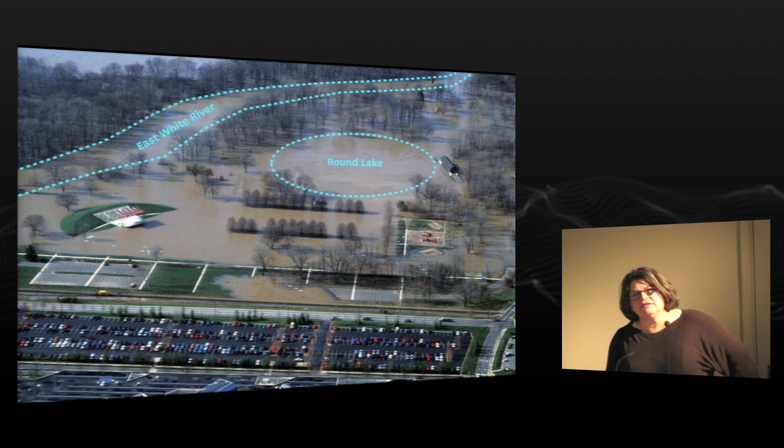This is Millrace Park, a fairly recent photograph of it. I bring it up because this was the first major project that the firm undertook, and the reason it was so challenging is that it floods. And I realized as I was preparing for this lecture that in those days, one really didn't think about water the way that we think about it now.

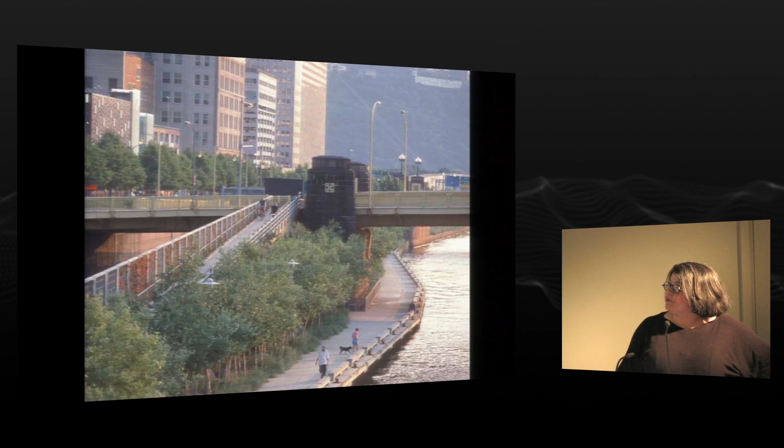Water was something that basically happened to your project, and you had to assume a position of defensiveness. In other words, you had to make sure that you could get all the silt off of the ground that was left. You had to make sure your light poles could withstand raging waters. And then the next large project we had was Allegheny Riverfront in Pittsburgh, and it too had this characteristic.

So we were starting to see a trend in our work, and really I have to say that it was with Allegheny that things kind of came alive for us in terms of how you work with a site in the condition that it's handed to you, and how you can start to use those aspects to not control the landscape, but manage it in a way that it can start to respond to the conditions that you're given.

So the first project is Alumnae Valley at Wellesley College, by now a mature landscape. I was there a couple of weeks ago, and it's really doing quite beautifully, thanks mainly to Wellesley's great perseverance in maintenance. But Wellesley is a really fascinating college in the sense that it was started in the late 1800s, and unlike many other colleges at that time, it really took the stance of looking at its geology and its physical history and plan the campus around that.

As opposed to someplace like the University of Virginia and many other campuses at the time that were still on the classical arrangement of an institution. And so for Wellesley, that was pretty advanced for the time. But the person that kind of directed them was Olmsted Jr., who did a master plan for them and identified that there were hills and valleys that they needed to respect.

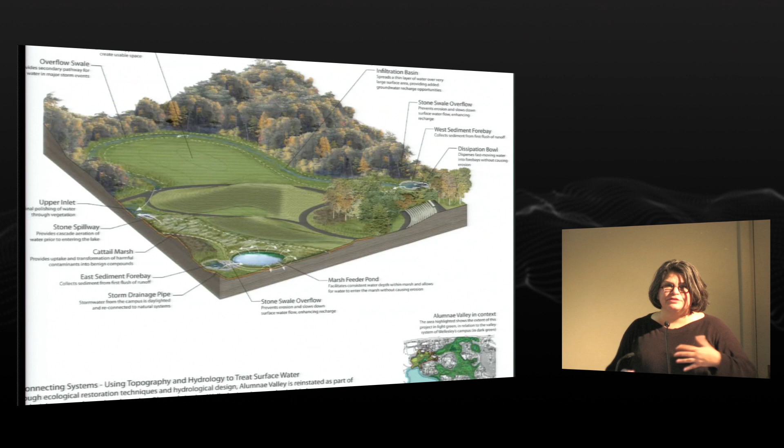out to Lake Waban. So the idea was to delay water and to allow it to be remediated by the plants, as well as just slow things down, because Lake Waban was being so taxed. And these are some of the devices that we used. This is the forebay that I spoke about. This is a sediment forebay, and all of this stone was unearthed as we were doing excavation on the site, so it was a great opportunity to reuse that material.

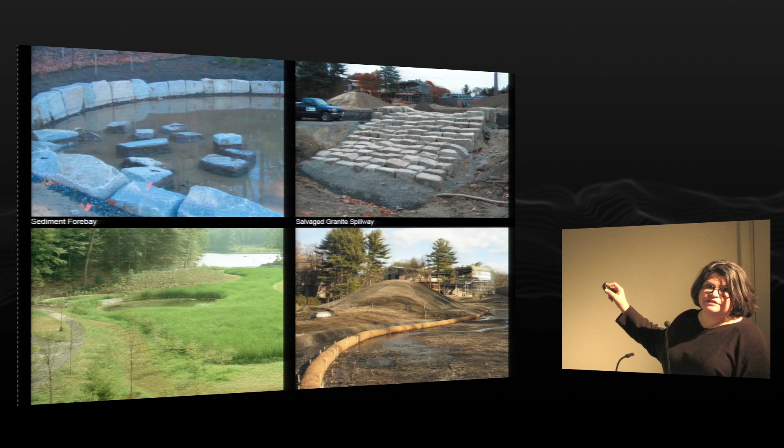So this is the spillway where both the marsh feeder pond and that long swale kind of meet. They go over these stones and get aerated. The water gets aerated before it goes back into the lake. So here is the cattail marsh and the feeder pond. So basically water is coming down through swales and also coming down to this area. It's settling here, solids are settled here, and then you have to clean that out every once in a while. But water is slowly released down here and then goes out to Lake Waban.

But of course it requires a lot of engineering to make all of this happen. But one of the things that these devices were used for was not just to do the hard work of cleansing the water, but also to add a level of intimacy and use, so that, for instance, this is at the base of the forebay. So there are rocks that are just kind of loosely tumbled there, and in dry times people can go and sit. You can also get to the water's edge and hear the bullfrogs, so kids tend to go there.

But the project really started as a complementary project to a campus center that was designed by Mack Scogin and Merrill Elam, fantastic architects. So this was a separate project. This was actually a site that we identified in the master plan as where the campus center should go, and it was right at the head of the valley that we were restoring.

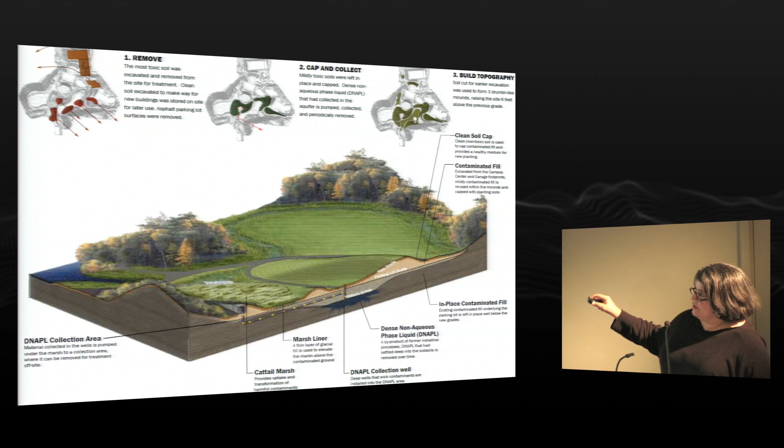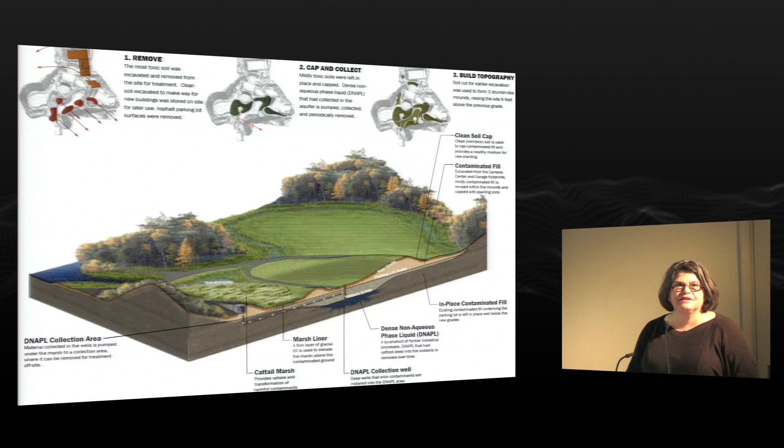So what we did is, this is the original grade. Because we had contaminated layers, we basically capped the site 3 feet and then put another 3 feet on top of that, simply to lose the amount of fill that had to stay on site. And then the mounds that resulted are really from using that additional fill.

So you can see that the mounds, which were a response to a problem with soils, actually contribute quite a bit to the experience of the project. So there are both flat areas like this for recreation, and then the mounds, which are covered in wildflower meadows and prairies.

I'm sure some of you are familiar with this. Back in 2007, the office took on looking at a master plan for the lower Don. Specifically, the project was to try to remediate the mouth of the Don, which over the years had really caused some pretty bad flooding problems.

And in fact, if you look at the area historically, this used to be a marsh. So here is the Don River coming down, and it was, of course, just as nature wants, going out and through the marsh, getting kind of cleansed, slowing down, and then being released into the harbor. But progress kind of changed that.

And interestingly, once the industrialization of that area started to occur, people were still, as we are today, interested in going to the water's edge. And in fact, they still wanted that experience. And so they would cross these incredible derelict lands in their Sunday best just to get down to the water.

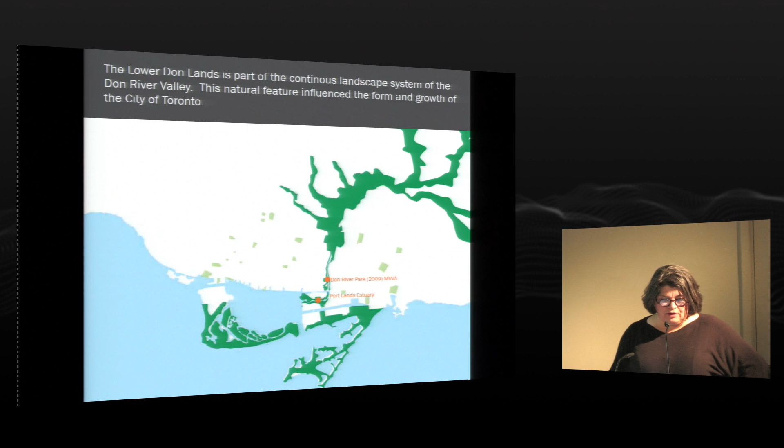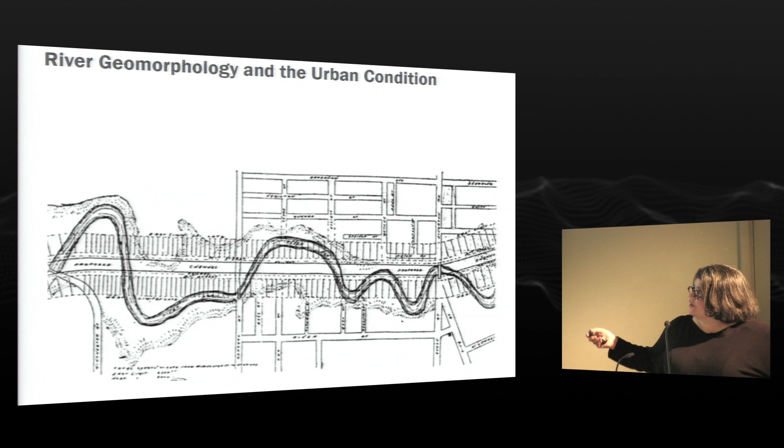This is one of the first things that we uncovered. It doesn't take a genius to see that when you channel a river that does this into this, you're probably going to have some problems along the way, because imagine stretching this out into one long string. It's probably 2 or 3 times the length that we're seeing in the channeled Don River.

And in addition to that stroke of genius to channel the Don River, the population in the area has just grown tremendously. So if you look at the impervious coverage just from 1990 to 15 years later, it's unbelievable. You guys are building like crazy.

So one of the first things we did was to work with our hydrologist. And by the way, I'm showing you these projects and taking full credit for them. But in fact, of course, every one of these has huge team members behind it. And so don't think that we're just so brilliant, we figured it all out ourselves. In fact, we rely a lot on sub-consultants to really help us figure these things out.

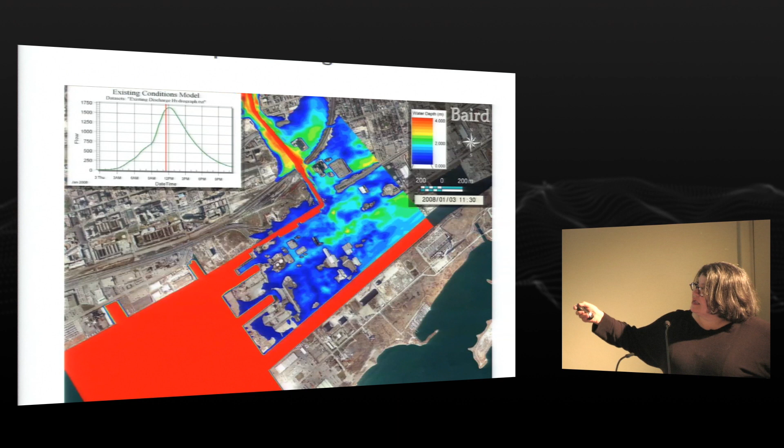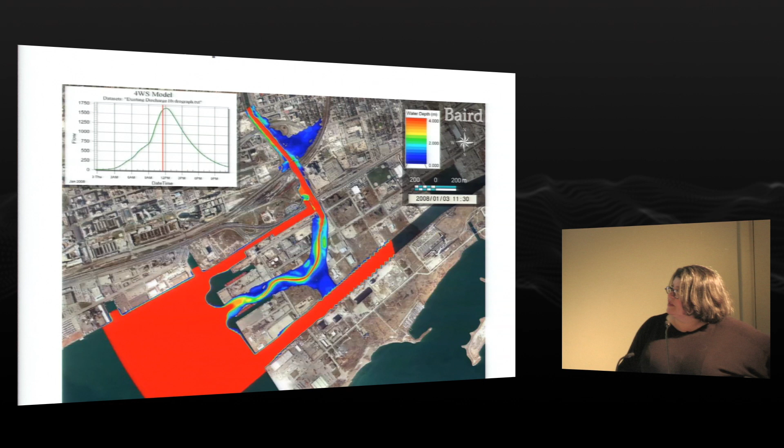This is the direction that we wanted to take it, where instead of having to take this sharp turn, which is not exactly how water wants to flow, instead we looked at a more naturalized mouth that would allow flow that would go in the direction that it would prefer to go, that it would go by itself if left unencumbered.

So this is the diagram that basically got us going on how we would handle this problem, which is the thought that if we're gonna let the Don River change its behavior at the mouth, then we have to allow it more than one way for it to get out, other than the narrow Keating channel.

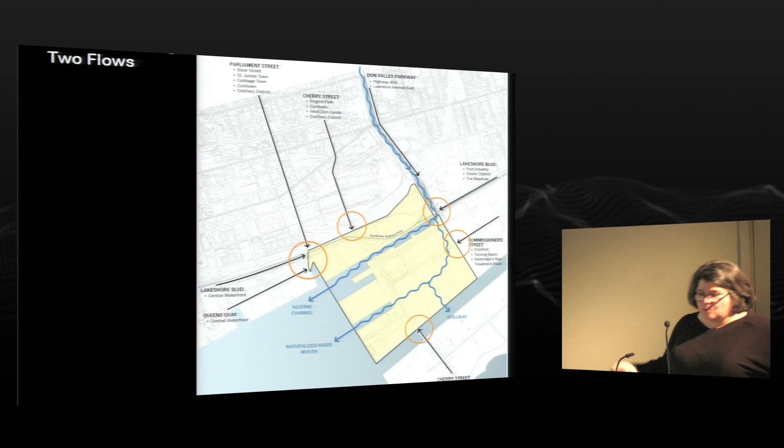So in fact, we started to look at those models that I showed you before and decided that we needed to have more than one way to get out. And not only that, but in the secondary route, there needed to be yet another spillway to help things along.

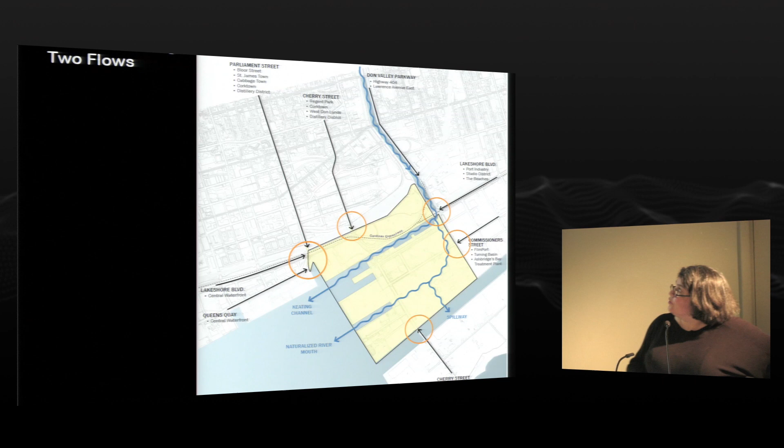But all of this comes with a lot of accessories, of course. So it's not just a matter of saying, okay, we're going to carve out the land and let the water go where it wants to go. It still is a pretty formidable force.

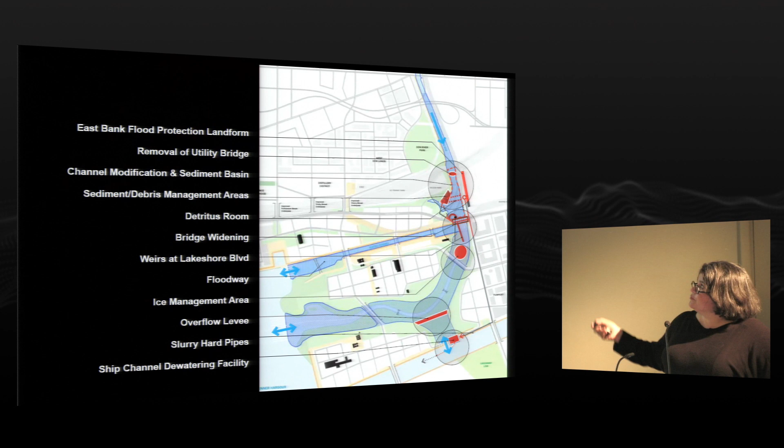And so a series of things like levees and thinking about where you put the ice when it comes down the Don, and what are the channeling, dewatering devices, where do you put the ships, where do you put the boats. And so all of this came into play, and as you can see, there's really quite a bit of infrastructure that has to be done in order for this to work. And the trick is, of course, how do you use that infrastructure to add to the project itself?

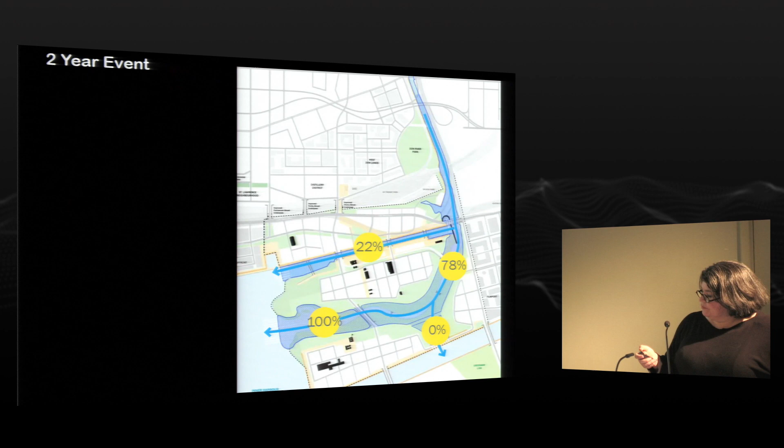These are some of the models that were done if we took the approach that we were talking about. So you keep the Keating open, and then you allow a spillway and you allow a diversion. So I'll flip through this and pay attention to the percentages. And what you're really looking at is this is 0% in a 2-year event. So 78% of the water goes there, and 100% goes out there, 22%. So you start to see how it changes.

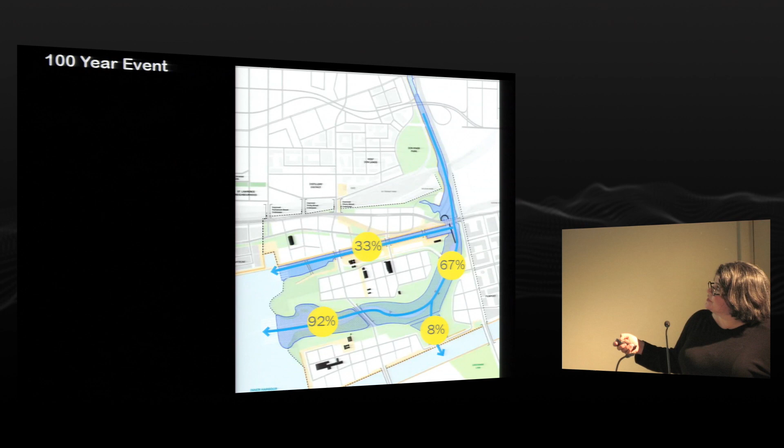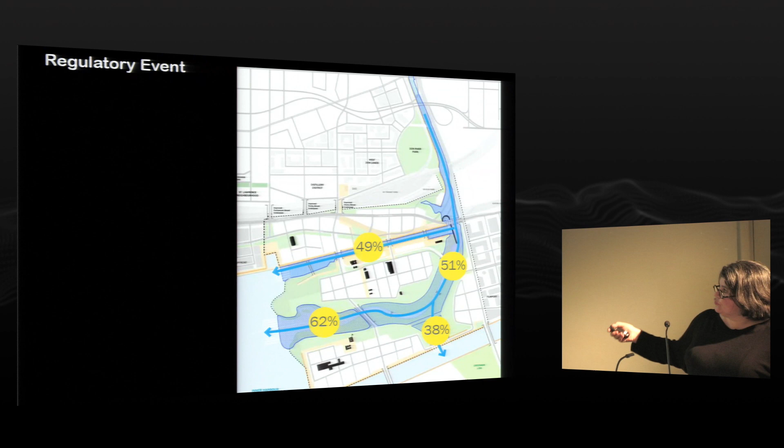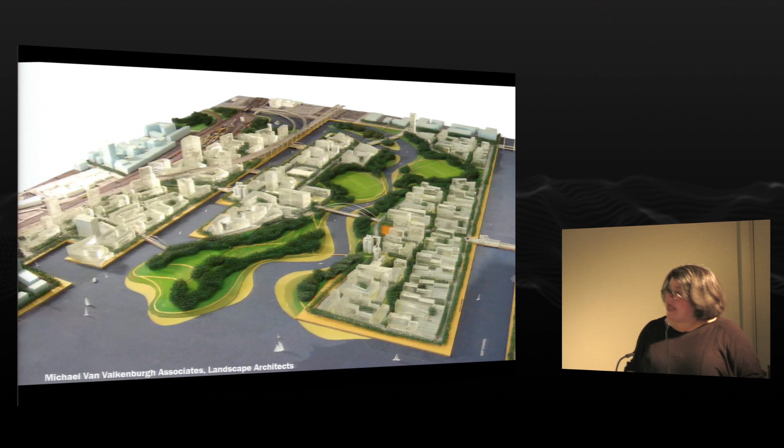So in coming up with this technological solution, looking at the hydrology of the site, it starts to help form how the site is going to be organized. And one of the benefits of splitting up the flow is that you create much more waterfront, right? So you have the Keating Channel left intact, but now you've got this flow, and so instead of one piece of land with water on the perimeter, now you have a lot more potential to have more people face the water and a chance for people to actually interact with that water.

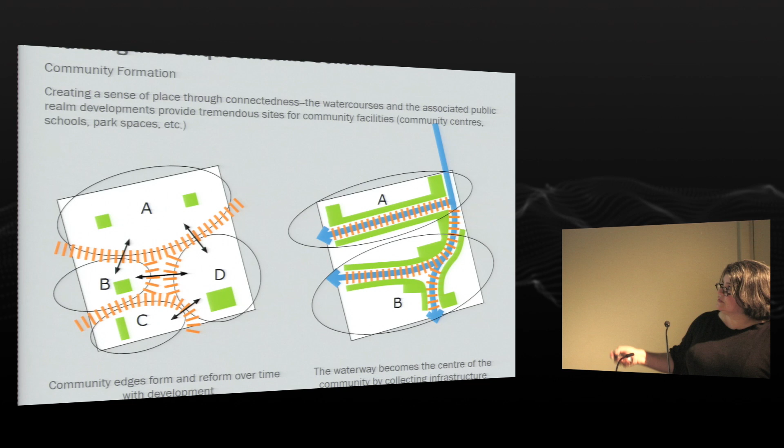And so you start to come up with different diagrams whereby the prime real estate isn't at the edge, it's actually in the center, just as much as it is at the edges. Don't squint too hard to read this, but basically we did comparisons of what the current Port Lands proposal was and what would happen to these various categories in the planned improvements and then the improvements that we were talking about. And so what you see is that in every case, you basically increase the amount of water area or the development fronting an open space. And so by making that split, you actually improve the quality of life for the residents in that area.

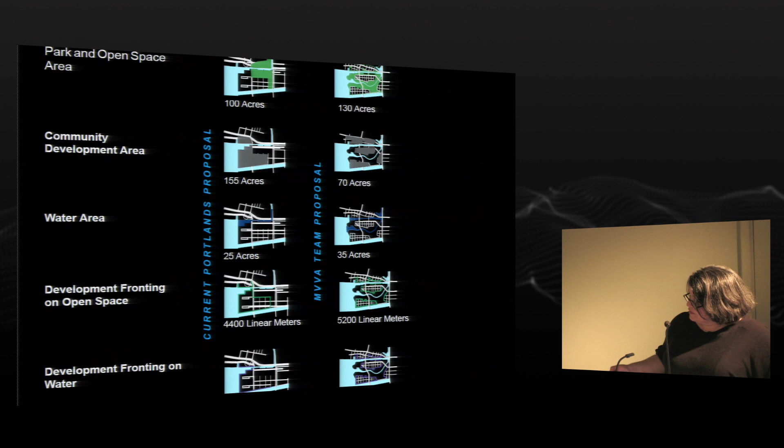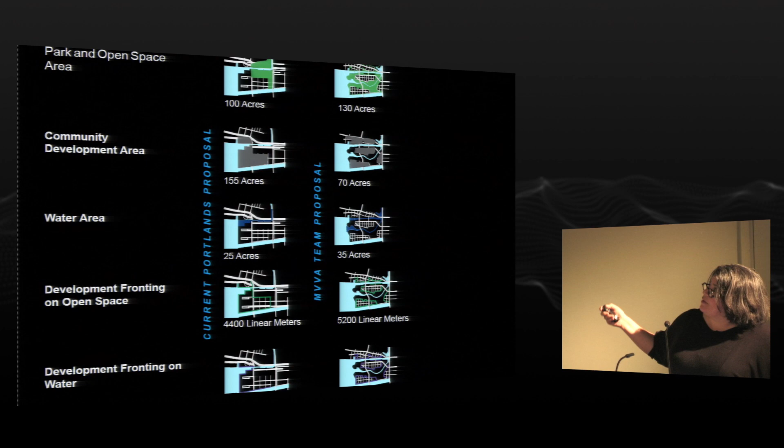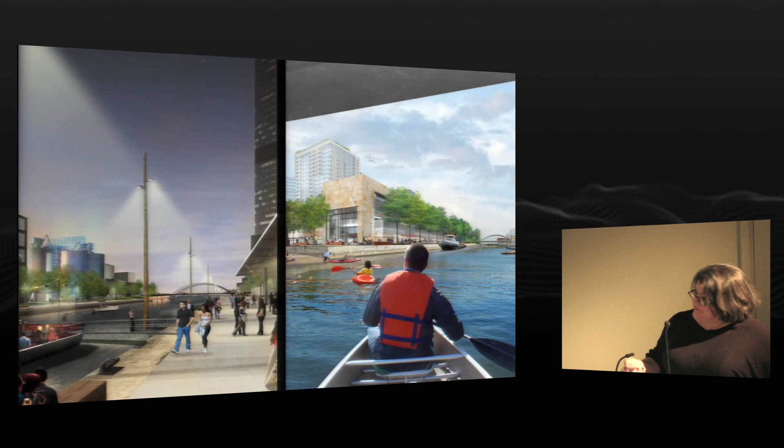The only thing that you actually decrease is, oh, wait a minute, may not be on here. Oh, community development area actually decreases, but the way that happens is the numbers are kept up by increasing the density. So you're trading buildings for landscape. What this does when you suddenly have twice as much waterfront is when you're looking at the design, suddenly there are many opportunities for different and varying landscape conditions. So you start to look at hard edges, soft edges, what happens at the Keating Channel if you're going to leave it basically as it is, what happens when you go underneath bridges. So you start to come up with a whole series of landscapes that were never possible before, and increase the versatility of the entire complex.

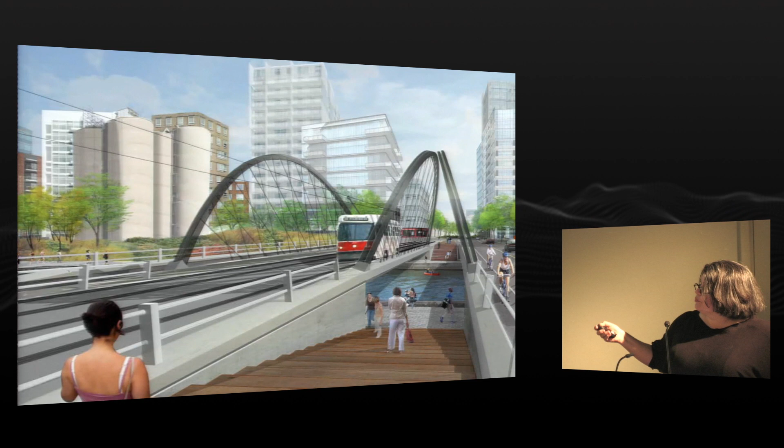And things like how does public transportation work? How do you approach the water from the Keating Channel? And then, of course, all of this green space that we've made has to be thought of in a very different way. It has to be compatible with the forces of the river.

We're just finishing up the Bush Library in Dallas, Texas. In fact, I was there yesterday. It was chilly. It's like what it is here.

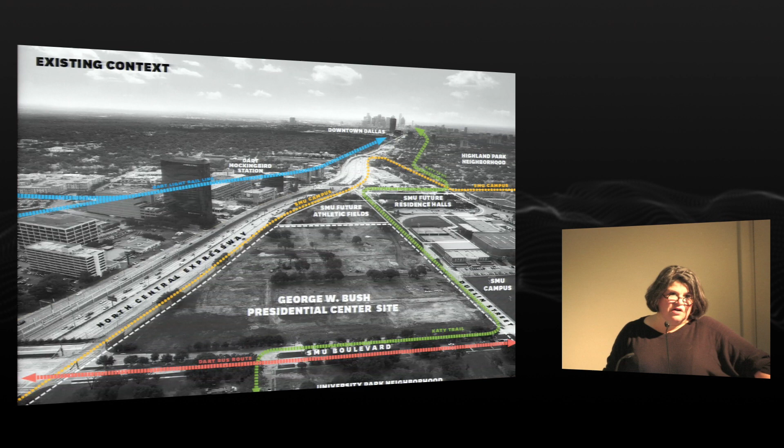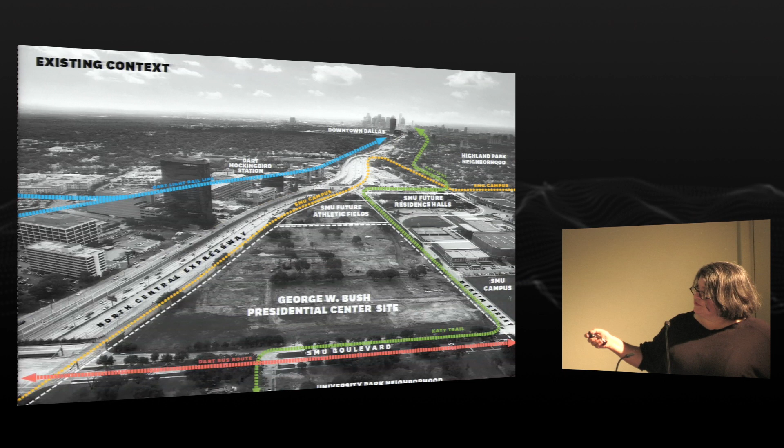And I should take a moment and say that Laura Bush was fantastic. At the Crawford Ranch, she has completely restored their prairie. She is no dummy about this stuff. You just don't get anything past her. But I can say that she was really the prime force in deciding that she wanted the full 25 acres. She negotiated hard with SMU to get the full site because originally they were offering them half of it. And she also decided that when they put in this landscape that it would be open to the public. And she really lobbied hard for all of that.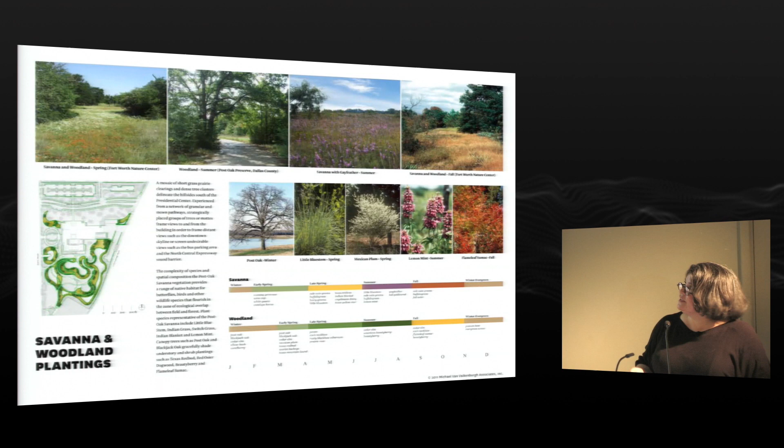So we would prepare these boards and go over things with her, and she'd say yes, no, maybe so. But the idea started very simply. The building is by Robert A.M. Stern.

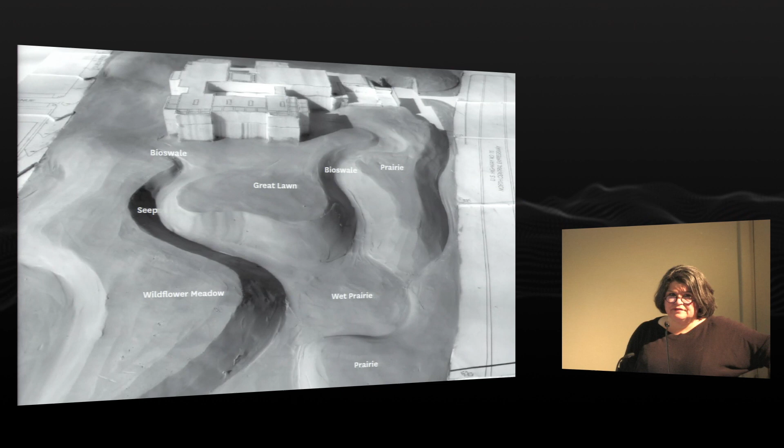And once again, an architect handing us a lot of fill, 70,000 cubic yards of excavation from this building that covers 4 acres in its footprint. It is huge. And so we had to, again, keep all of that material on site. It was too expensive to take off.

And so this is an early study model where we started to think about the building having a plinth or the Great Lawn, and then how we would have water move through the site. So these are bioswales, something called the seep, another bioswale, prairies covering all the hillsides, and then everything draining down to a wet prairie, and then a wildflower meadow on the highs as well.

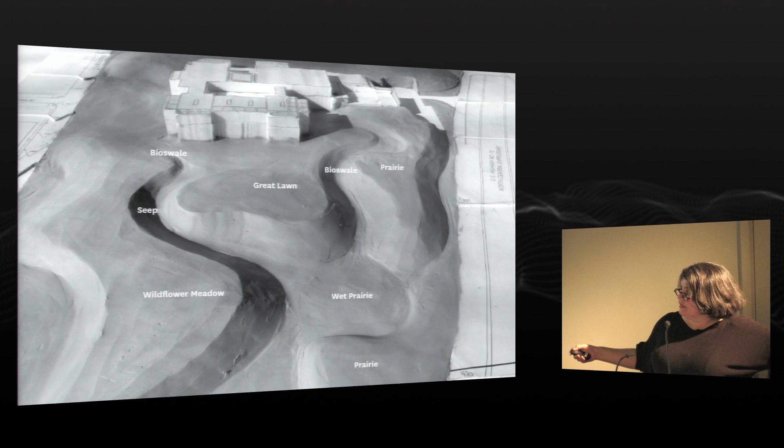So these are diagrams that we do early on to kind of study how things are going to work, as well as explain things to our client. I was talking with students earlier and saying, when you have really complex ideas, you need to try to make them as attractive and as clear to clients as you possibly can. And so you get into these quasi-technical and illustrative plans.

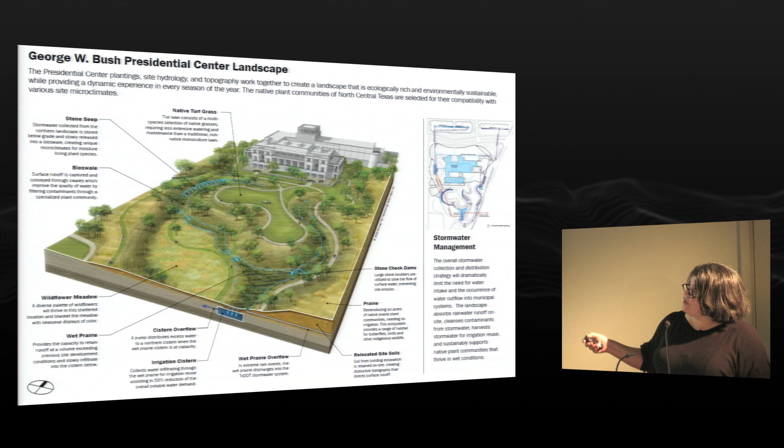So this is the advancement of the design. There's the great lawn that forms that plinth in front of the building. Here's the bioswales that go along. That's the seep. And then this is the wet prairie. And so if you look at how the water is channeled, because there are droughts in Texas all the time, one of the things we wanted to do was to make sure that we could capture as much water as possible to irrigate the landscape.

So basically the way that it works is here's the building. There are parking areas up top. The parking areas are divided, so this parking area actually goes into bioswales, is piped underground, goes into an irrigation tank here. That overflow is then directed to another irrigation tank under the wet prairie. Likewise, with all of the topography, water is coming off, going into those seeps and swales, and ending up in the wet prairie. So this is the low point on the entire site.

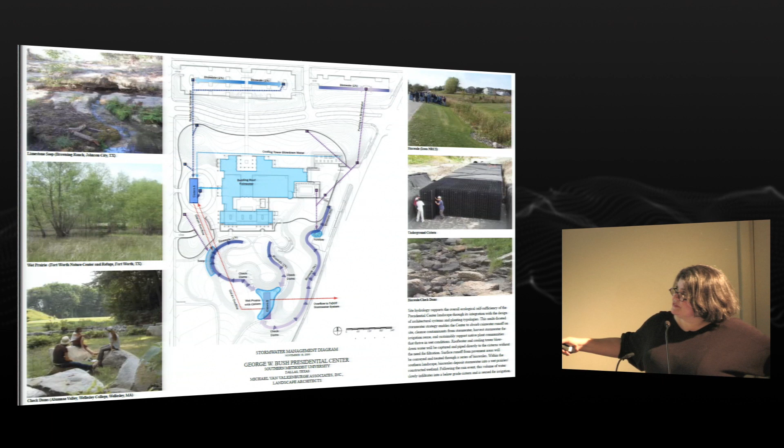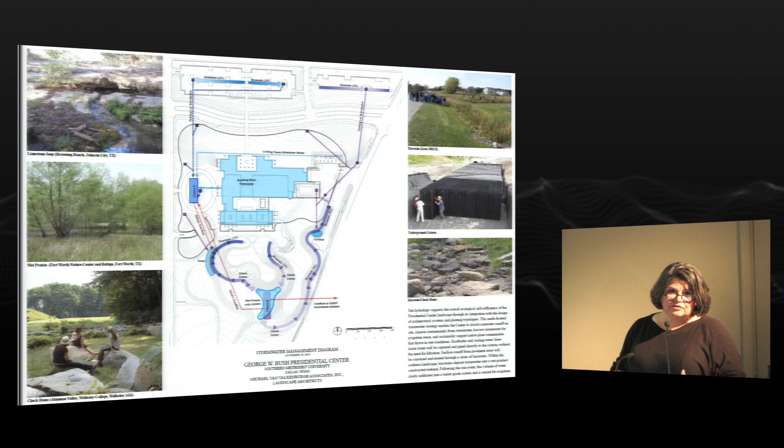Likewise, on this side of the parking lot, all of this water is collected through the bioswales, goes down and is connected and is exposed in forebays that then continue on down seeps and swales down to that area. So absolutely everything is going to the storage tanks. We are going to store about 300,000 gallons of water.

And then, again, a board that we prepare so people understand. So this is the stormwater cistern that's going to be here and here. We talk about ways that we might have the natural landscape work with people using the site.

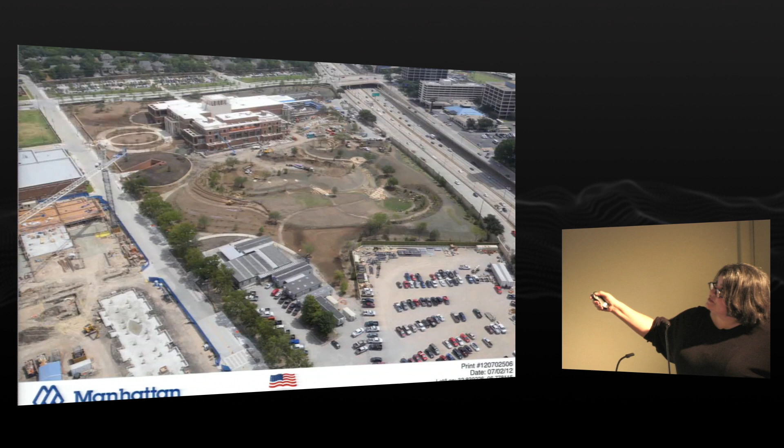This is a picture last summer of the project, so you can start to see some of those devices showing up. So here's the parking areas up here. All that water is coming down into something called the seep, which is there, goes down underneath bridges, and then ends up in the wet prairie. Likewise, this side comes down, is revealed in this forebay, and then again comes down into the wet prairie.

One of the things that we were faced with is that we had absolutely no soil on site. That soil that you saw was full of rubble. We used it, but we couldn't use it as topsoil. So one of the things we had to do was to bring on design soils. And one of the ways that those affected the hydrology on the site is that we also use those to absorb water so that it would go underground.

In other words, not everything was overland flow, but in fact the soils were designed to be permeable enough so that they could take water and hold it for the plants. So we're not just relying on irrigation, we're also talking about holding as much water as we can. And then, quite frankly, when you install design soils, they're devoid of some biology, so you have to introduce that, so we had a program for that.

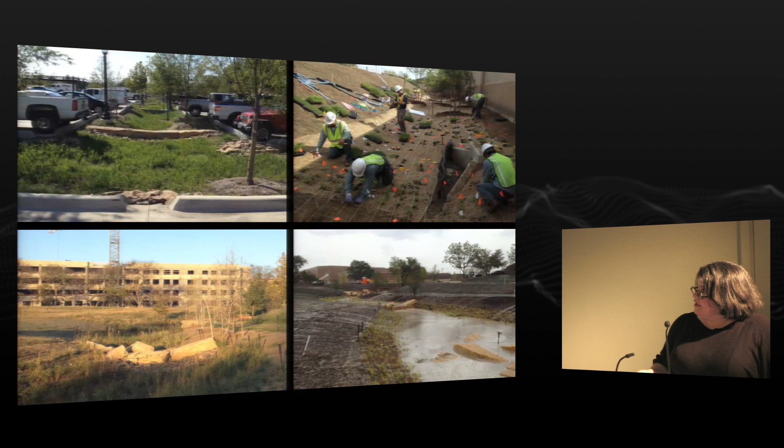But some other devices, just to look at quickly: these are the bioswales up in the parking area. Some of the swales that are at the toes of slope. This is something called a check dam, so it's just basically stones, and you can see there's a different species of plants that can take that water. This is that same area flowing full, so this check dam is this check dam. So this is what happens, and then it slowly seeps through some stones.

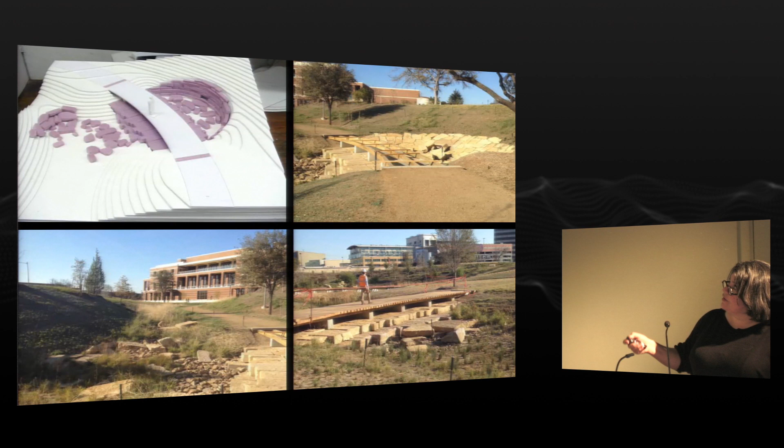So the forebay, again, studied in model, changed our mind a little bit, and instead of it being a wall, ended up being this splayed back device. But one of the ways that these work is that these are the swales, so water is coming from here, going into a swale that eventually goes down into the storage tank. But to slow this water down, there's a series of stones that have gaps between them.

So the water flows between the gaps, and then you can sit on the deck and put your feet on the stone, or you can go down to the next layer. But it's a way for people to be able to get close to what's happening, to the forces and the dynamics of it. And that was very early morning yesterday.

So I'm going to talk about a series of projects. We've been looking at stormwater control for a long time. This is the Herman Miller production plant in Georgia. And the basic idea here is it's a production plant. They have a need for a huge amount of parking for their staff, just the factory workers. So here's the factory and here's the traditional way of looking at the parking lot, and then you might even have a deep retention pond.

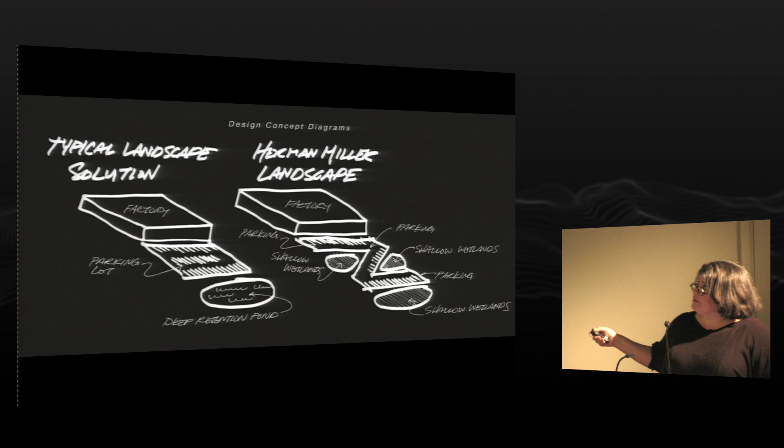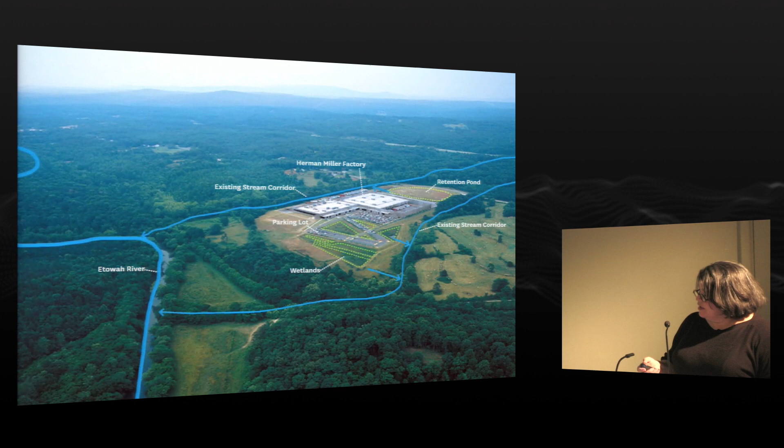So we suggested that, in fact, what we should do is take this and kind of intersperse it through the parking so that you basically break down the amount of overflow that's coming into a retention pond and slowly release it into shallow wetlands that then go out into the adjacent creek. So you can see this is kind of in the middle of nowhere, and there's no such thing as storm drainage to connect into. The only place that you can drain into are the stream corridors.

So this green is the series of wetlands. So here's the parking area. You can see it comes down, so it flows into this area. There's a connection underneath here. They also flow at different points into that stream corridor. So you're basically creating a series of wetlands. You're taking as much water as you can, the roof runoff, parking lots, under drains from the buildings, and you're taking them through this series of wetlands that then slowly releases, right?

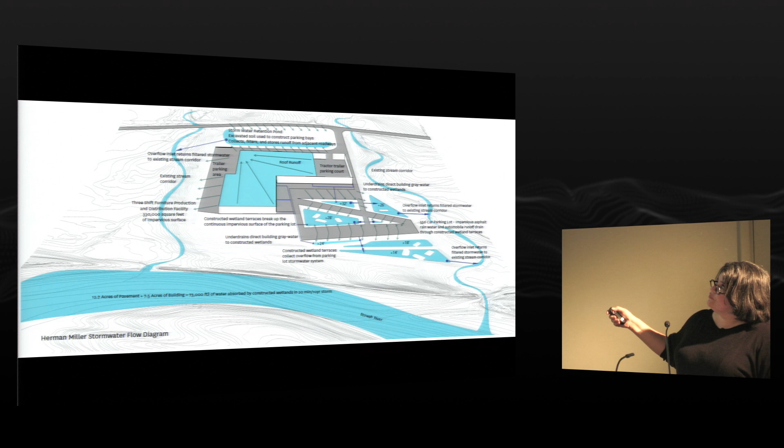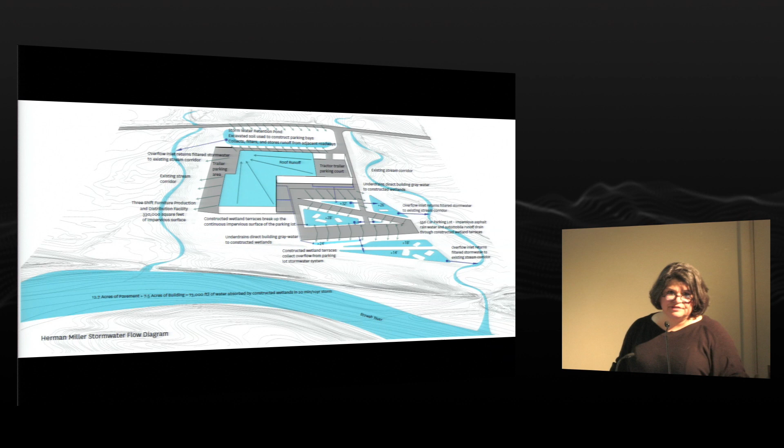The trick for this is that you don't want to dump a lot of water into an existing system because you'll overburden it and create other disasters, change the ecology, etc. So this way you're creating new ecologies as well as preserving ones that already exist.

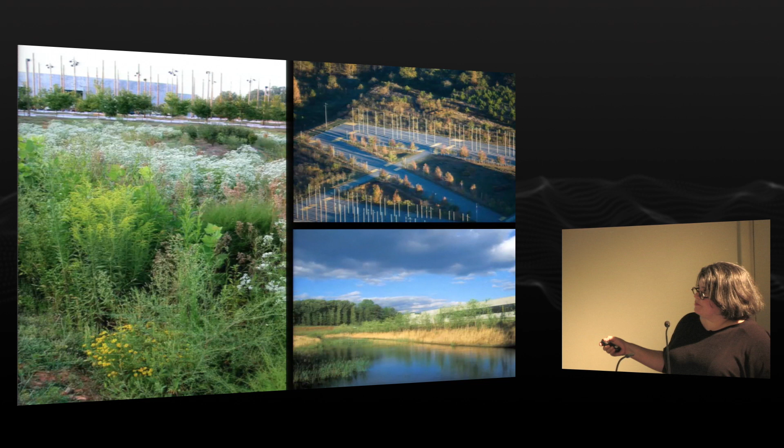So this is the parking lot after working hours. So basically you can see the wetlands in between, and then beyond are meadows that were created to look back up. And then they do have a retention pond, but it's on the other side of the building, and it basically holds water that comes from that side, but that water eventually gets released into that stream as well. So that's looking at the same pond from the other direction.

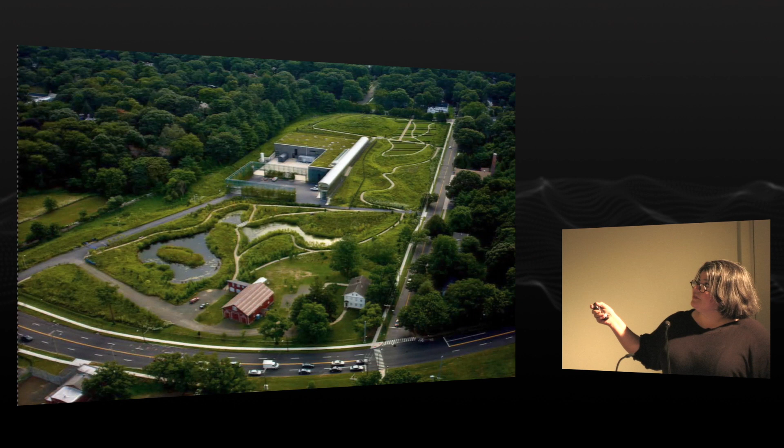Lake Whitney Water Treatment Plant was a project we worked on with Steven Holl's office. It's basically a water treatment plant that's almost entirely built into the hillside. It's an amazing building. And again, this was a flat site. There was an old water treatment plant on here. By the way, this is the Eli Whitney house, which is why this is called Lake Whitney. And here's the building. I'm giving you a little glimpse. Now, for security reasons, nobody can get into that building who isn't supposed to be there.

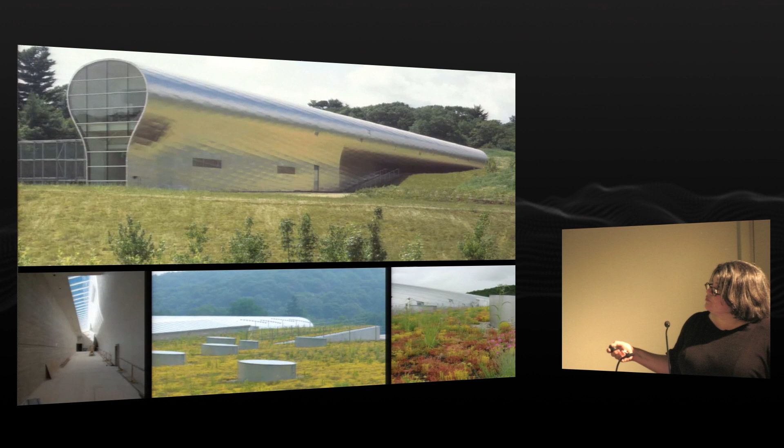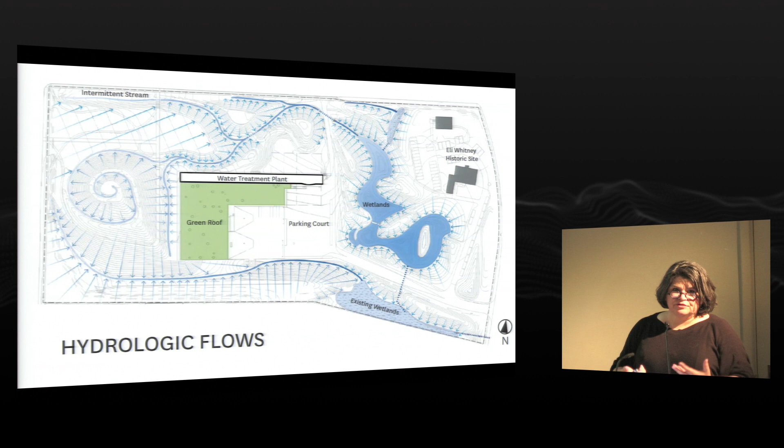So there's your treat to see the inside of that. And then the green roofs that I pointed out before. But really, the real work of this was the idea of what happens from raindrop to faucet. So we wanted people to understand what happens with water.

And again, we had a lot of excavation from the building. So again, up come the mounds. So basically, in every direction, you're collecting water and directing it to wetlands that we created that then slowly seep out into the existing wetlands.

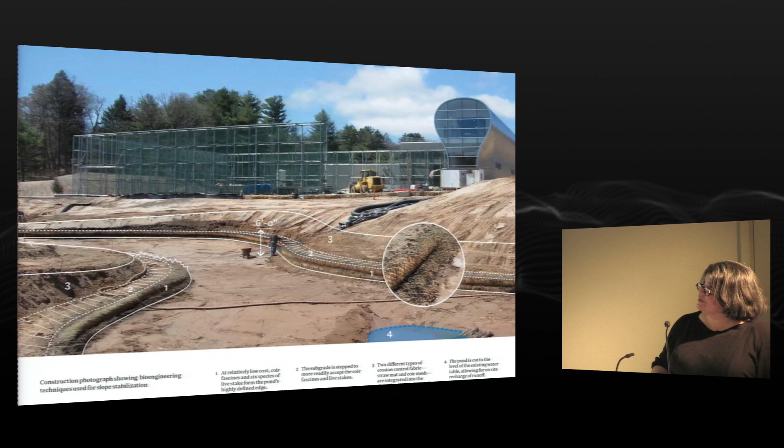But in order to do this, a lot of engineering, of course, has to take place at the edges of these wetlands. So you start to see things like coir logs, slope stabilization, hydric soils to hold water. It starts to become this very complicated, but at the same time, necessary system to make sure that everything is going to function properly. So these are that same body of water over the seasons.

But there's also the upland areas that do contribute to that water system. So this is a swale at the toe of the slope. And one of the things that we often get involved in is how our landscapes are going to be maintained. We consider that a lot because I have to tell you that that's one of the biggest heartaches for landscape architects: how is your project going to be maintained?

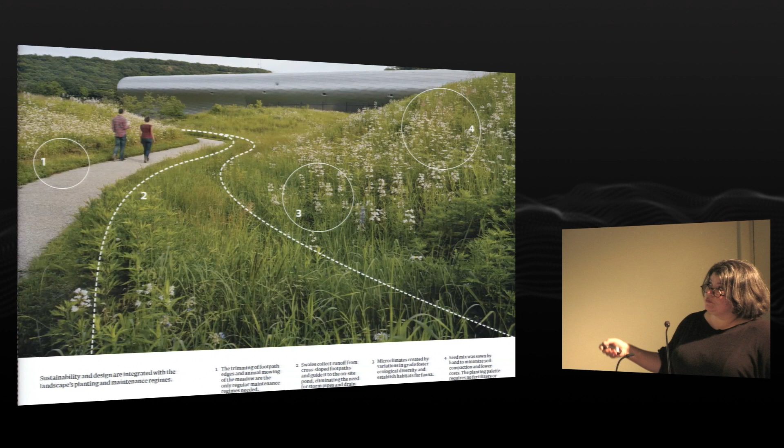You have this vision, and yet you've got this dynamic landscape, and whoever takes care of it has just as much power as you. So we decided to make shorter grasses in the swales that could be mowed by maintenance people and would also help to keep the water flowing because they're lower grasses, and then meadows and wildflowers on the slopes.

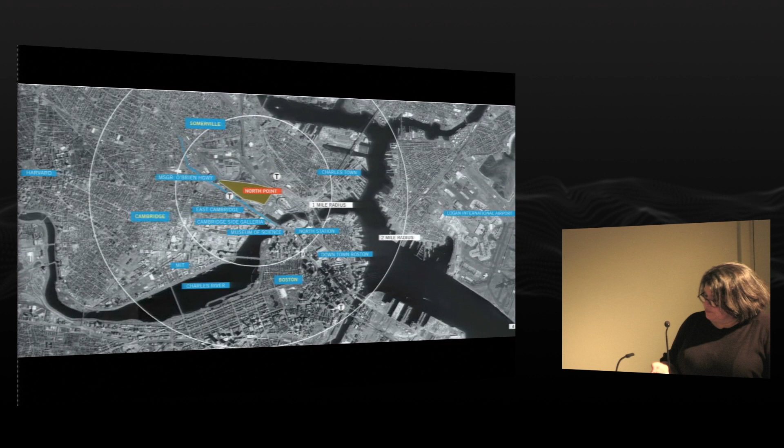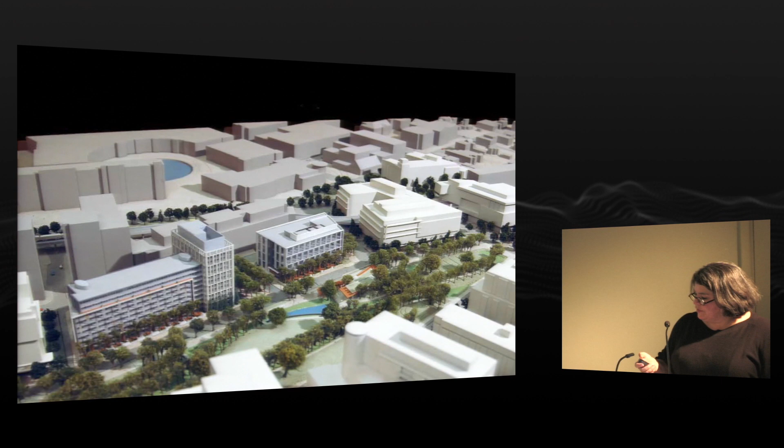This is a project of ours that rarely gets any kind of promo. It's a project in Boston. This is it. It's called North Point. And it's a project that was one of those large brownfield areas where a developer decided that over 25 years they would develop the property with a number of buildings. But one of the first things they decided to do was kind of reach back to the 19th century and build an amenity first. So they asked us if we would design a 7-acre park.

And that was the good news. The bad news is that they only had $500,000 to do 7 acres. Do the math, it's not much. So when we first got the plans, one of the things we noticed, a civil engineer had been there before us, is that there was $1 million in infrastructure, piping, catch basins, et cetera.

And so we said to them, look, let's get rid of most of that. We're going to need some of it, but let's get rid of most of it. And if we do, and we can do it successfully, can we have that money for the landscape? And they said, have at it. So basically, what was created is again another wetland.

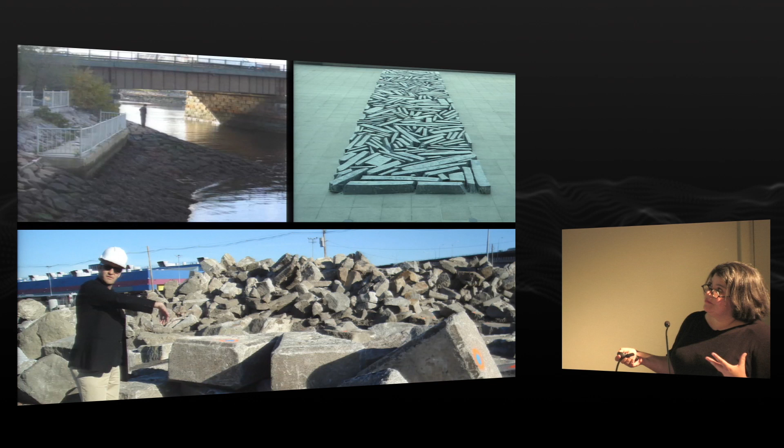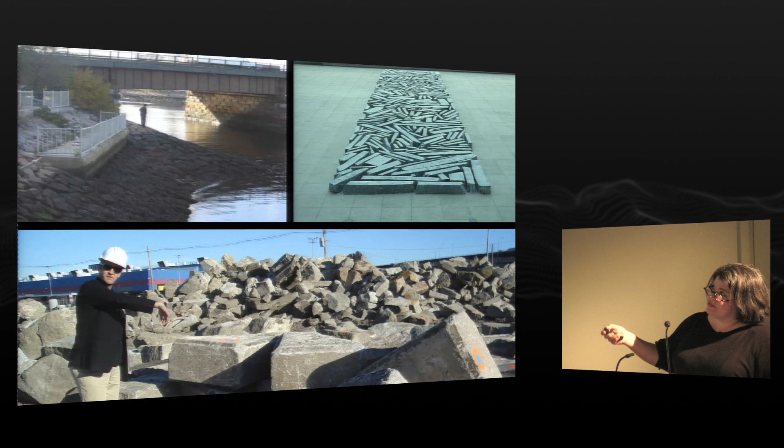And one of the devices that we used was there was quite a bit of stone on the site. These big piles that were taken up in excavation. So kind of looking to Richard Long and how those pieces would go together, as well as existing slopes on the Charles River, we started to look at how we could use that stone around the site. And so these are various devices.

So the way that we got rid of the infrastructure is that there are swales all over the site that fill during stormwater events, eventually fill up here and then flow over into the wetland over there. But you can start to see the different ways that we use stone that we found around the site. So basically this is a swale that fills up to that level and is conveyed to another area just like this.

So there's the installation of the stone. Took a lot of sorting, but definitely worth it. And then the end result of that. They did build 3 of the buildings, and they've done really well. In fact, the developer told us that they always have trouble selling ground floor units, and that those were the first units that went when they put them up for sale. So the park did its work.

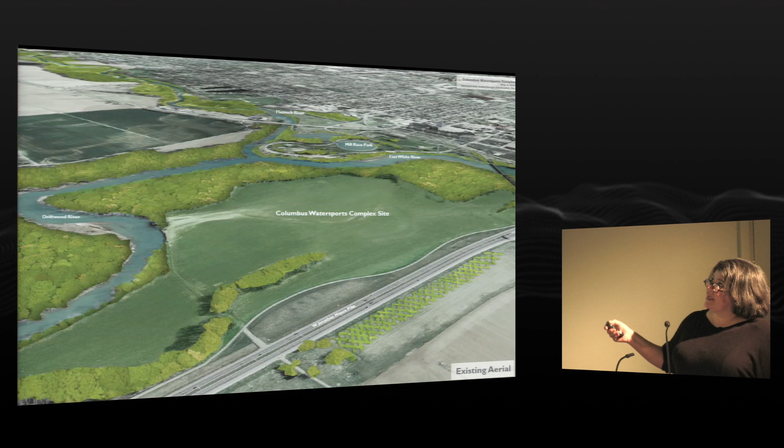Tried to show you mostly built projects, but here's one that I thought you would be interested in. So remember Mill Race Park? So there's Mill Race Park. We're back in Columbus, Indiana. And someone approached us and said we want to do a water sports complex, like water ski, jet skis, etc. And there was this very large piece of land off of the river that they had purchased.

They didn't even ask us. They purchased it and asked us to come up with some ideas. And so the idea was to create these long ponds that you could do jet skiing, etc. And then use the water from the existing river, because you're certainly not going to fill up these with potable water. So it's a matter of working with regulators to be able to divert some of that water through a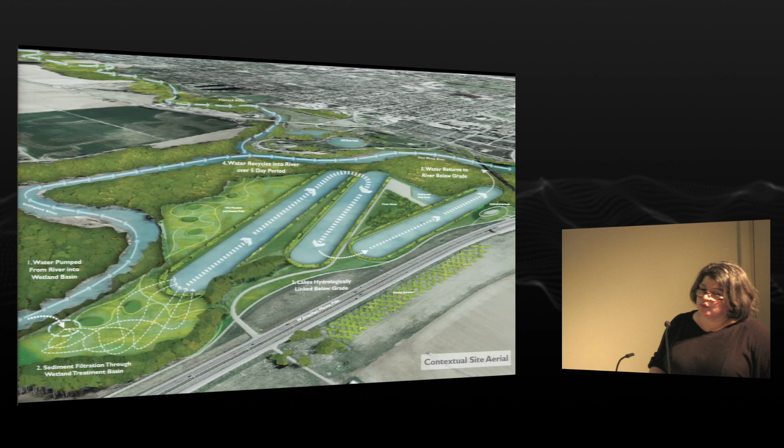wetland so that it gets cleansed, so you're not getting a lot of sediment, and then basically channeling the water through and then re-releasing it up on that fork of the river. It also helps in ameliorating some of that drainage issues that we saw before.

Brooklyn Bridge Park, which is a long-term project for us, started in 2003. It's basically looking at turning this entire docklands into public park. And this is, just to put you in context, this is Brooklyn Heights and, of course, Lower Manhattan, the Brooklyn Bridge, and the BQE. And this is incredibly derelict land, and yet at the same time, all of the infrastructure was in perfect shape because it got renovated just before they stopped bringing boats here because the draft to the water just wasn't deep enough.

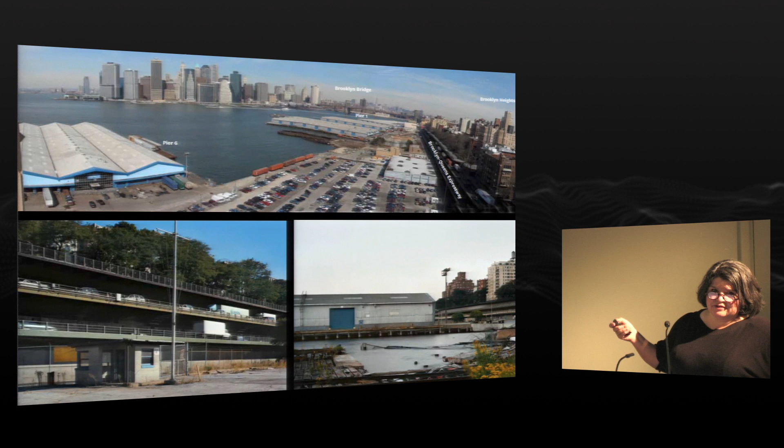And so there are all sorts of mysterious businesses in here. Like you go inside, they're like a speakeasy. It's just so bizarre. Some of these people, their skin's practically transparent because they spend all their time indoors. So a lot of tough conditions, right? These old buildings. You can see the water has really been disabused in some areas.

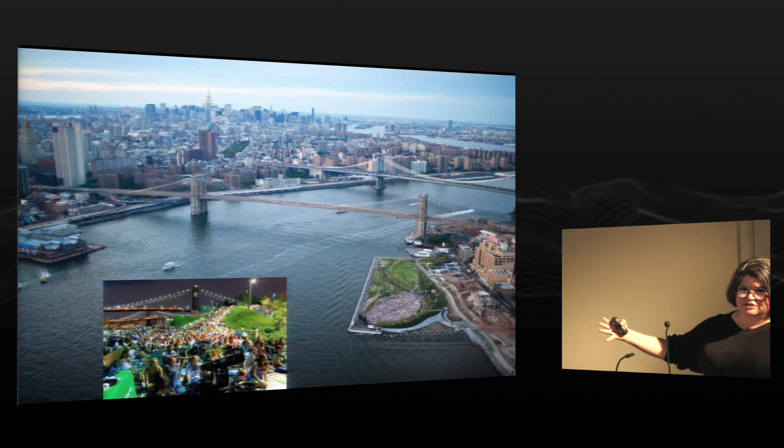And this is phase 1. There are actually 5 different phases. We've done 2 of them. This is Pier 1, and we've also done Pier 6. And the idea is that you build from each end. You do bookends that go to different neighborhoods, and you work your way in. And so we're now on the 3rd phase of work. But I just wanted to talk about this area.

So, this is the first site we built on because of the prime real estate that it is. Plus, it was the only piece that was on solid land. Everything else was on piers. And so it was actually the easiest to construct as well. So this is the pier. So this is on terra firma. And this place just gets used unbelievably. One of the things about New Yorkers that I've always admired is that they really know how to use their landscapes and their open space, and they use them well and often.

But when we were looking at how the drainage might work on this pier, one of the things we did was kind of analyze for ourselves, how does drainage typically work on a New York City street? And then came up with a different way to think about how we might collect water for irrigation and how we might also use on-site treatment swales to cleanse that water before it goes into the collection system.

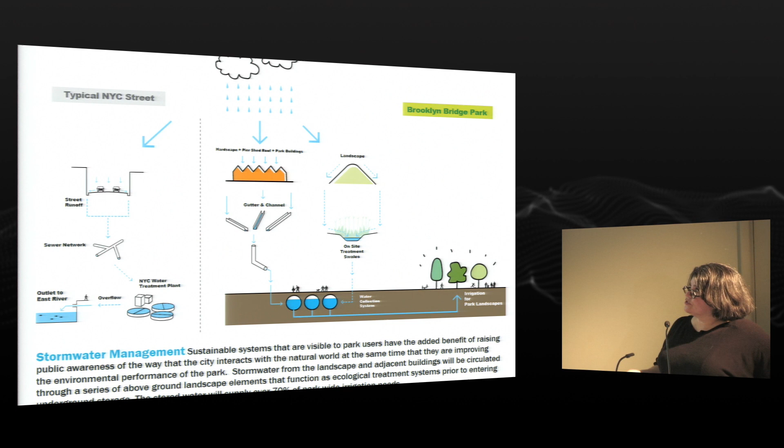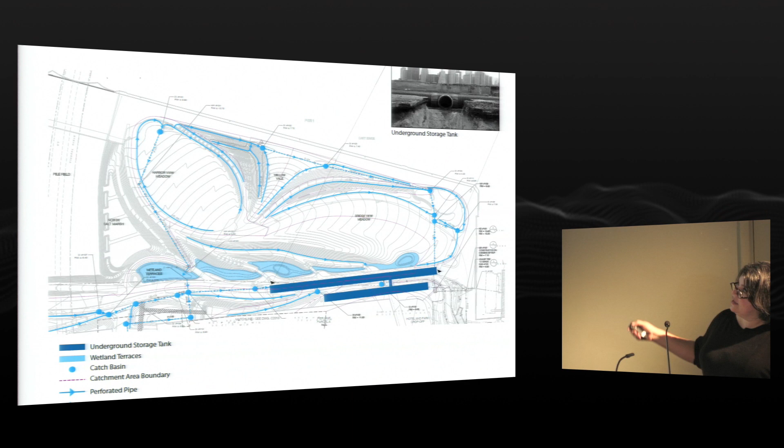There is going to be some development on the site, quite controversial actually, but it is going to be done, and we'll take all the water that we can get from anywhere. So this is that diagram. Here is the East River, right? So the Brooklyn Bridge is over here. And again, through a series of underdrains and swales, all of the water is collected in these. They're not tanks, but they're actually giant underground pipes that store the water and then slowly release it, either for irrigation or back into the water after it's been cleansed.

So this is a series of ponds that were created, wetland ponds, that eventually lead out into the bay, but it's cleansing all of the water that's coming off of slopes. And that's what those look like. So here's one of the wetlands. There's a bridge over it. This is looking from the lawn to the wetlands below. And then there are paths created. So this is where that wetland kind of outfalls into the water. So it moves through these plants and then is slowly seeped out in that wall.

And again, by using the infrastructure and revealing it, people are able to use it for pleasure. You know, to take a walk, to sit and look at the most fantastic view of New York that can be had in the area.

And there are ways to get down. You can take a kayak down to the river. You know, we left things like this in place, all of these piers, simply because we thought they were interesting and it costs a lot of money to take them out.

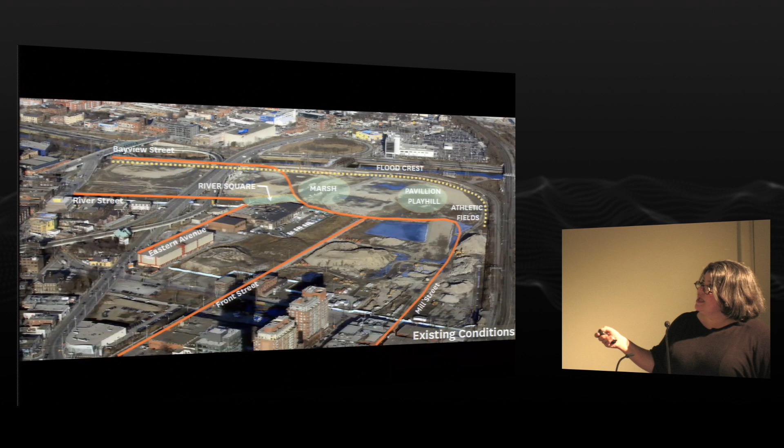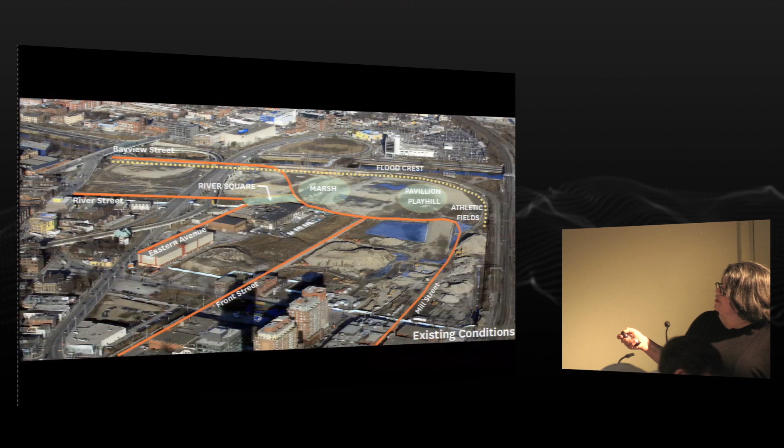And there was a decision made that on top of that landform, a park would be made. And so we were fortunate enough to be selected for that. There are also some accessory areas like River Square. So this was the beginning of construction. And here's some sketches to kind of convey those ideas, but the idea is really simple.

There are more regulation recreation fields, and there's this mound that is very active. There's a play area, there's a water play area, and then on this side there's an urban marsh and topography that surrounds it. This is that active hill. There's a pavilion there. This is by Mary Ann Thompson Architects, and this is the play area in front of it. It has a water play area, so it has water coming out of fountain heads.

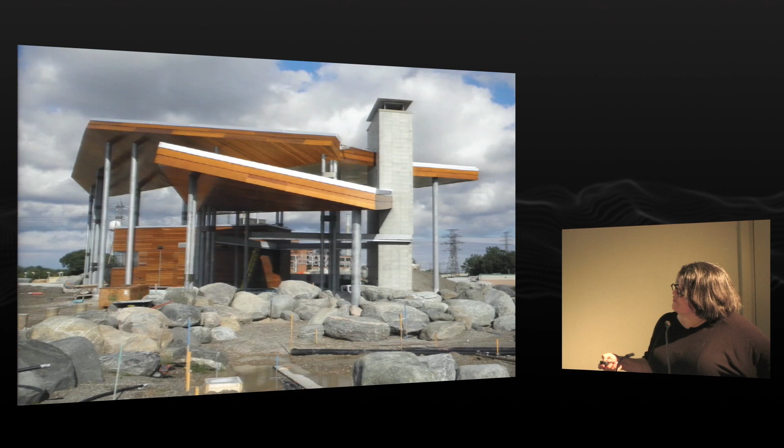And then this is the other side of the equation, which is the marsh area. These were taken last summer as we're finishing up the park. It'll be done in the spring, I hope. So a boardwalk that goes over the marsh area, lots of stone to kind of hold in the slopes, as well as create habitat areas for the critters we hope will show up.

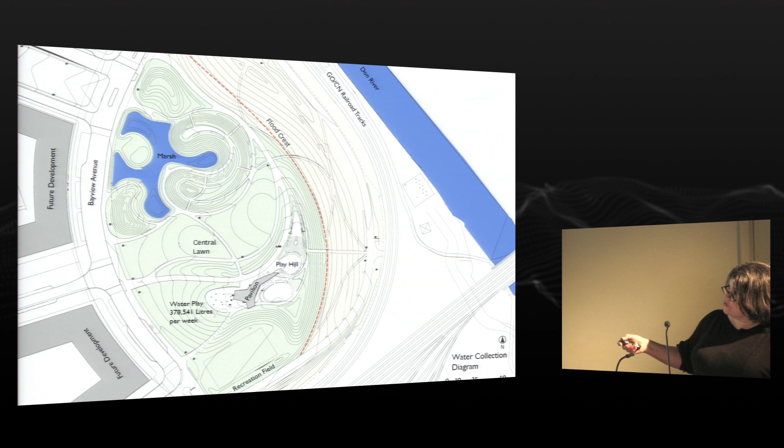And then just a quick series of diagrams to show how this actually works, because this was a very unusual problem of how to maintain the marsh in a healthy state, as well as provide irrigation, and collect as much stormwater as we could before it goes into the city system. So here's the basic diagram. So there's that central lawn. Here's the play hill and water play area, the marsh with the topography surrounding it.

When we first suggested a water play area, the city was fine with it, except they said, we're not going to use any kind of filtration system. We can't maintain it. There's just no way. We don't have the personnel or the facilities. So we really thought a water play area was the right thing to do there, and we started thinking, okay, well, what are we going to do with all that water? We don't want to just dump it back into the stormwater system. And you can see it's quite a bit of water. It's over 100,000 gallons of water per week.

So we started talking with our ecologist about what we could do with this water, and with our irrigation people and with the soil scientists. And one of the things that was immediately obvious is that in order to maintain the health of the marsh, we needed to have water circulating through that area. And the only way to get water to circulate was to have water pumped into it. So all of this water is actually piped directly to the backside of the marsh, goes through a hard pipe, is released, and basically pushes water through.

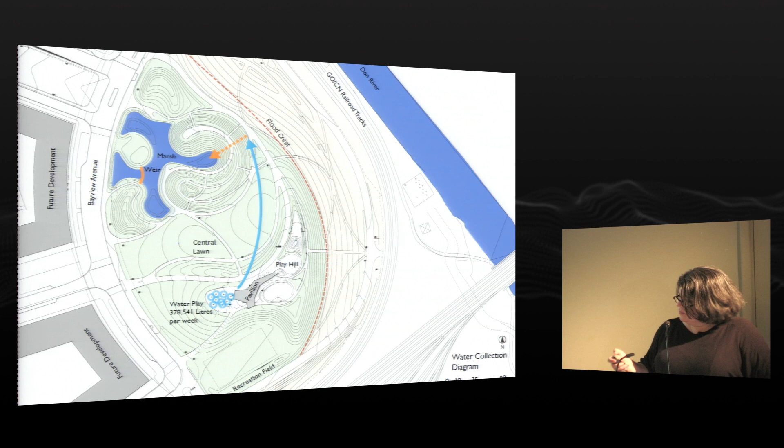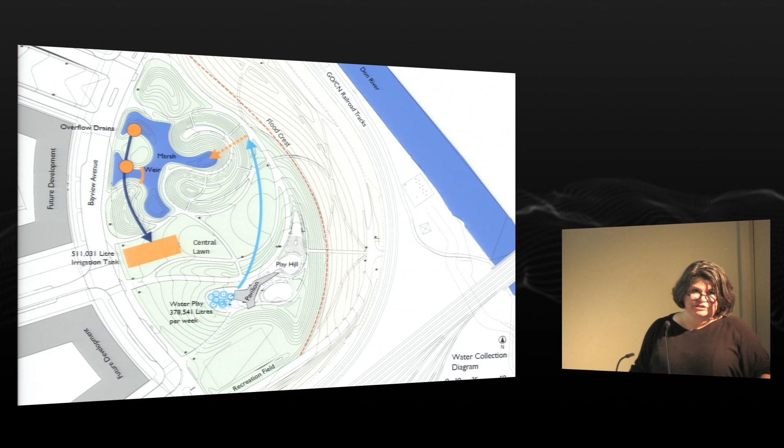So what happens with the water? Well, in the marsh, there have to be overflow areas during storm events, so those basically get taken to an irrigation tank. So we had about a 135,000 gallon irrigation tank, which is what it takes to water the park during a week.

So now we're starting to see some infrastructure, and then we also collected all the water that we could subsurface. So these are subsurface systems off of this recreation field, off of the central lawn, and those are all diverted either into the stormwater tank, or they go into the marsh to help those areas that are tougher to get at. And then you have irrigation, of course, being distributed from the tank.

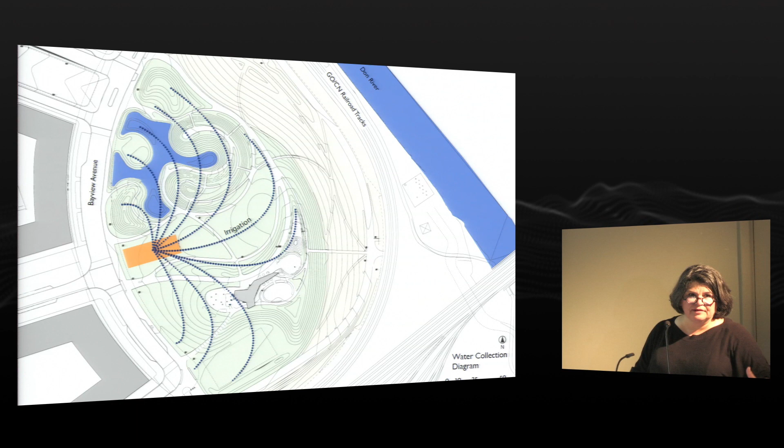So effectively, we take the water from the water play area, we push it through the marsh so that it's used, and then we use it in irrigation, and then everything that irrigation runs off into goes back into the water tank. So it's this system that basically recycles itself. So would I prefer not to have any potable water in the system? Yes, but on the other hand, we're using it at least 3 times and more as it gets recycled through.